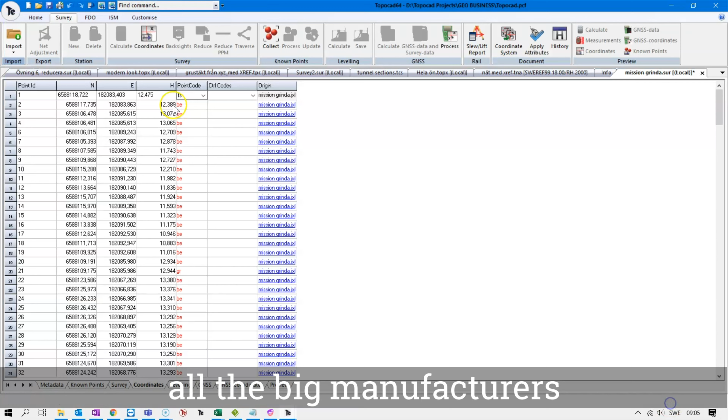That sounds great. In Topocad we have a lot of different documents, and each document has its own workflow. Firstly, our survey document is where you import your survey data. Does it matter what instrument you're using? No, it doesn't matter. In Topocad we support all the big manufacturers, and we also import more open formats such as LandXML or DXF. Oh, that's nice. Yeah, and we can also do an export here to our network adjustment module.

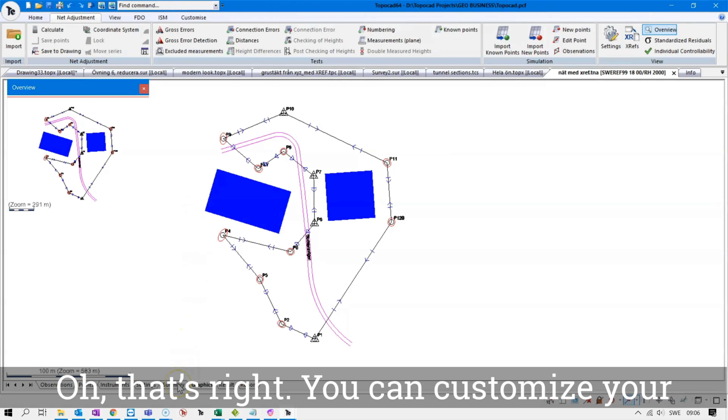Oh, that's right. You can customize your Topocad based on your own requirements, right? Yeah, that's right. So you only pay for what you want to use. That's good.

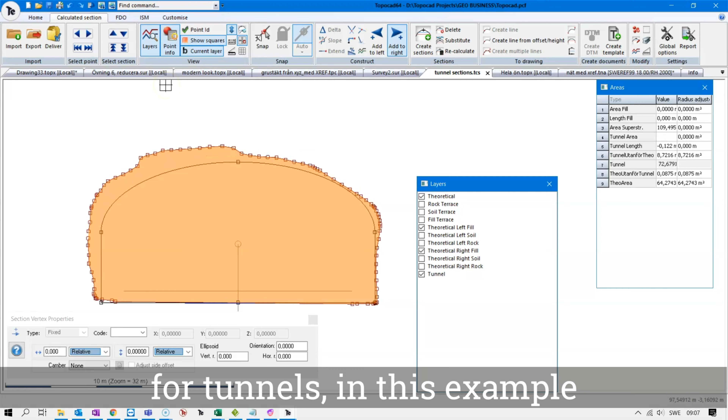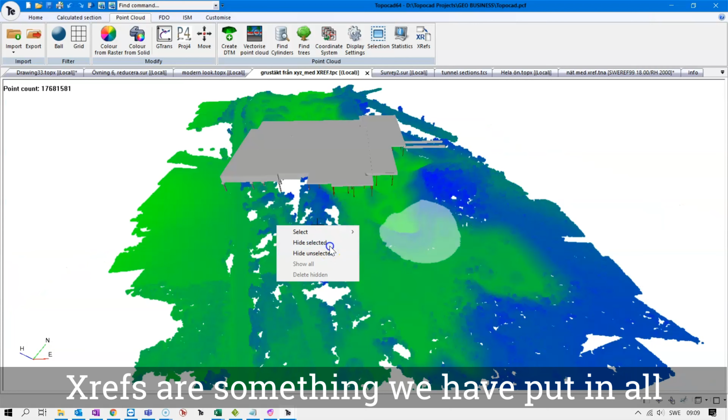And here we have our section module where we can do some volume calculations for a tunnel in this example. And we can also do roads in this module. Here we have a point cloud. In this case we have an external IFC model, which is something we have put in all of our documents now.

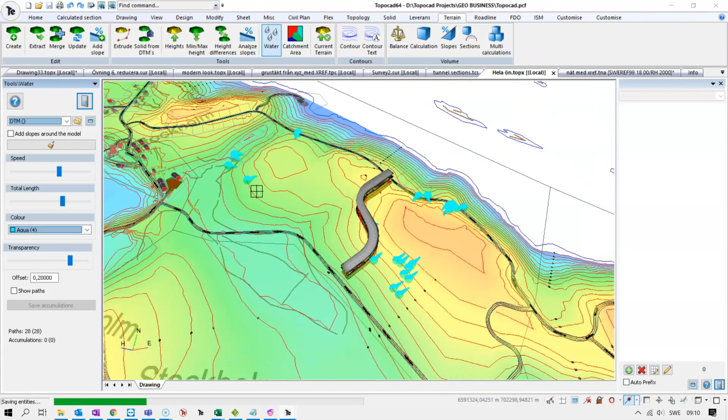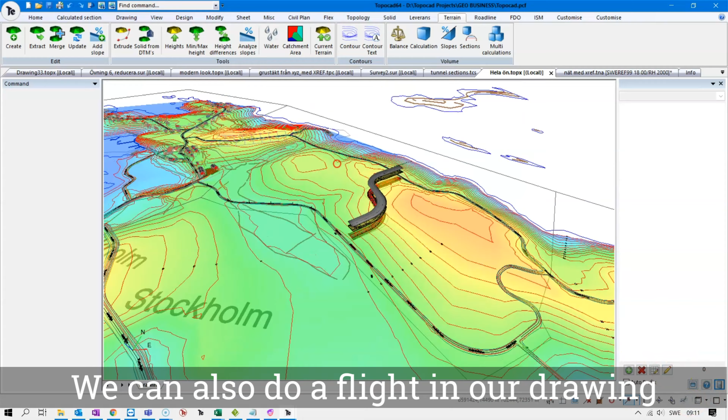And the drawing is the main document, and here we can do a lot of different things such as GIS analysis. You can make your maps here, and here you see how the water will end up if it's raining or something like that, right? Yeah, that's right. So we have some water analysis tools here, and we also do volume calculations and much more. We can also do a flight in our drawing. It's quite fun. Well, I think you get a great overlook over the whole drawing.

Thank you, Jacob. And now back to our most common questions. So the first question is, if the customer only gets an IFC model from the constructor, could you show us how to take out stakeout data from an IFC model? Of course, that's easy. Let's have a look.

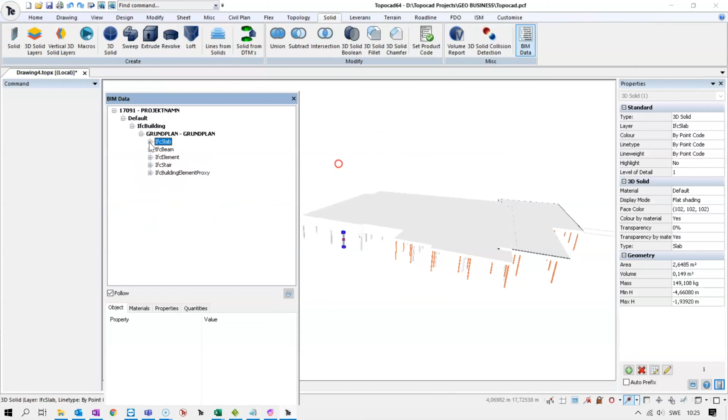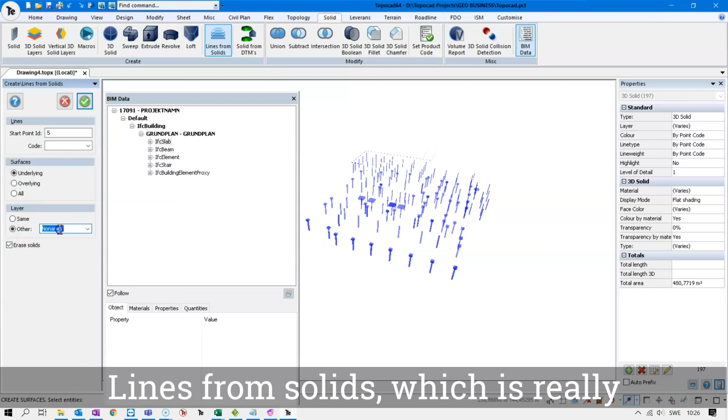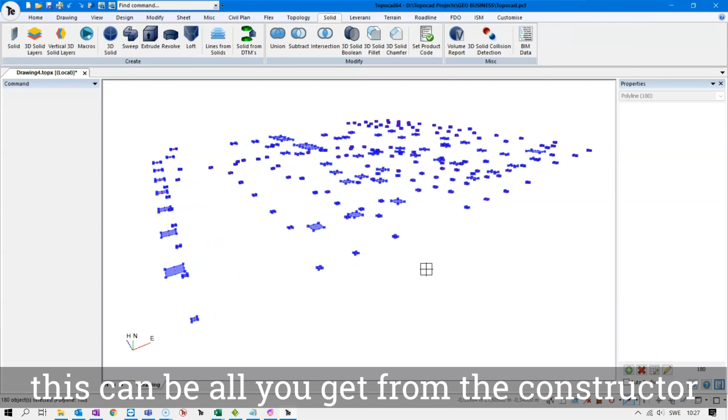Here we have an IFC model imported into a drawing. And here we can see I select the IFC objects based on their class, and I'm deselecting the parts I don't want. And here we have a function called lines from solids, which is real straightforward. We're just taking the underlying lines and putting them on a new layer. That looks really useful. Yeah, it really is, because oftentimes this can be all you get from the constructor, so I really get the want for this kind of function. And here we are exporting it into a DXF file, which you could take into your survey instrument. That's great.

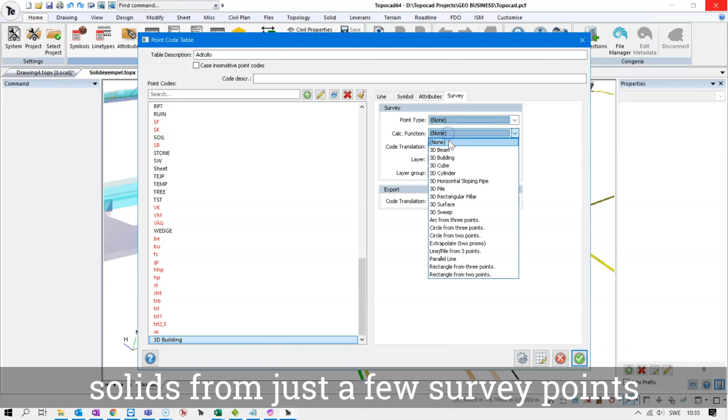Okay, I have one more question regarding IFC models. If the contractor wants the survey data delivered as solids in IFC models, can we do that in Topocad? Absolutely, I'll show you. We do that with point codes in Topocad. We can do solids from just a few survey points, and we do this from a point code. Here we can see 5 measured points can construct a whole solid house with roof and everything.

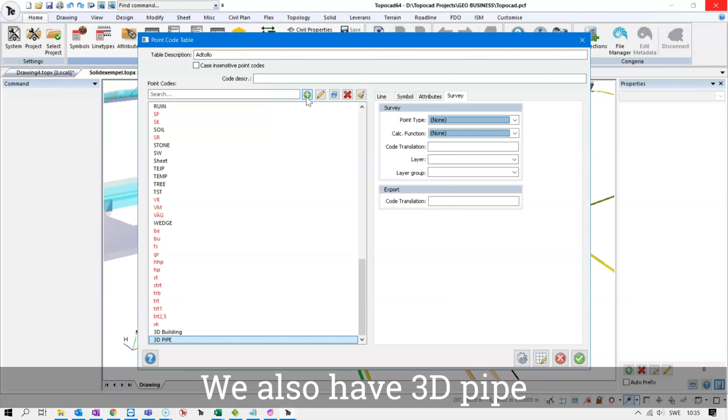We also have a 3D pipe, and this is just a regular line which can give you a whole pipe, and from your point code you select which survey line you're using, and the size of your pipe, and also the thickness.

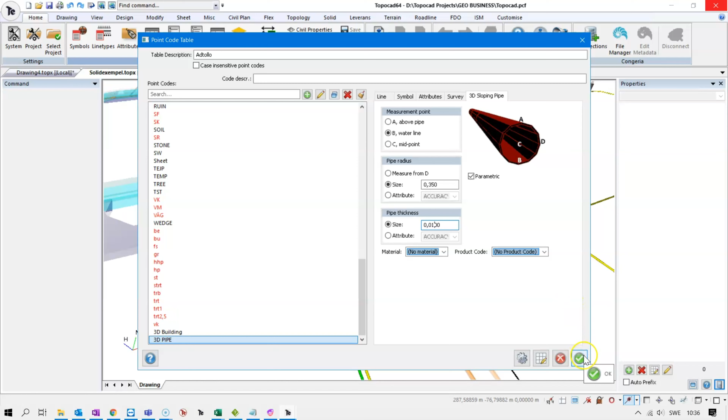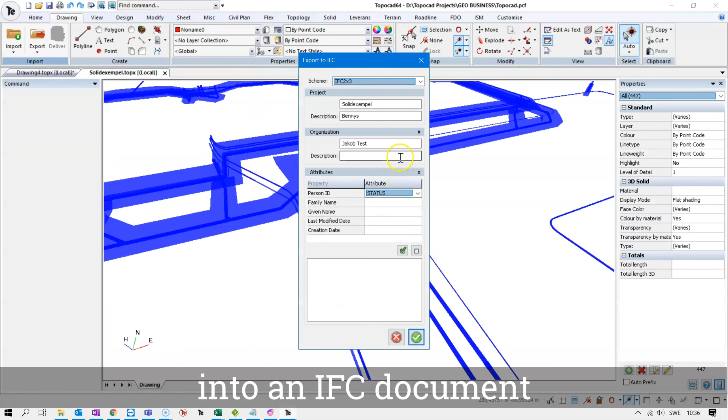This drawing we're looking at is made from one of our users, who is really into solids, and as you can see, it's a great looking drawing, and this is something you can just export into an IFC document. We have the 2x3 and the IFC4, and we're coming up with the IFC5 version of the document.

I have an example from one of my customers who wants to calculate excavation volumes and get them separated into rock, soil and fill. Yes, this is a very common task for our customers, and we have a great tool for this.

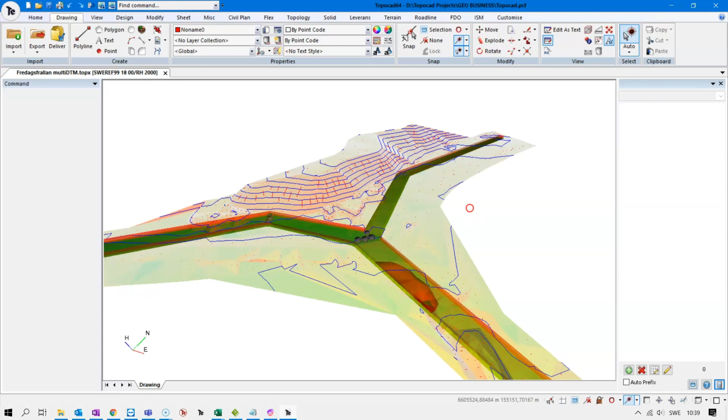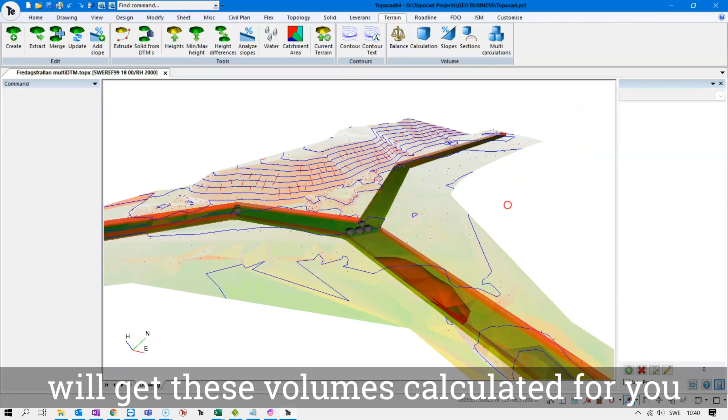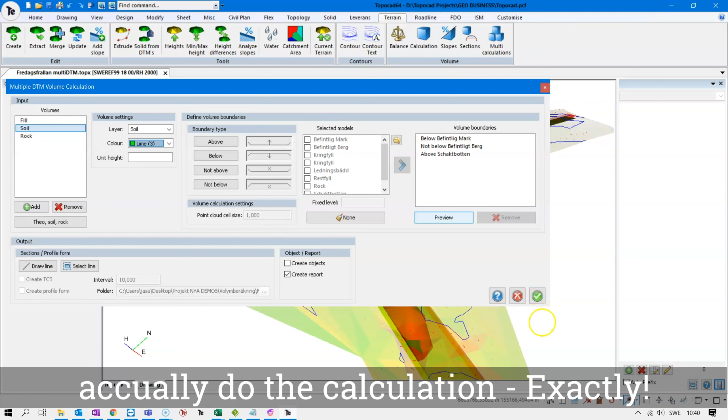For this we have our Multicalculation tool, where you can easily just select all of those surfaces, which would be the ground, rock and theoretical excavation model, and you would get these volumes calculated for you. Well, that's nice. Yeah, and we have this nice little preview button also, which helps you make sure you're getting everything as you may, so you can get a look and see that everything's correct before you actually do the calculation. Exactly, so you don't have to go back if you happen to mess anything up.

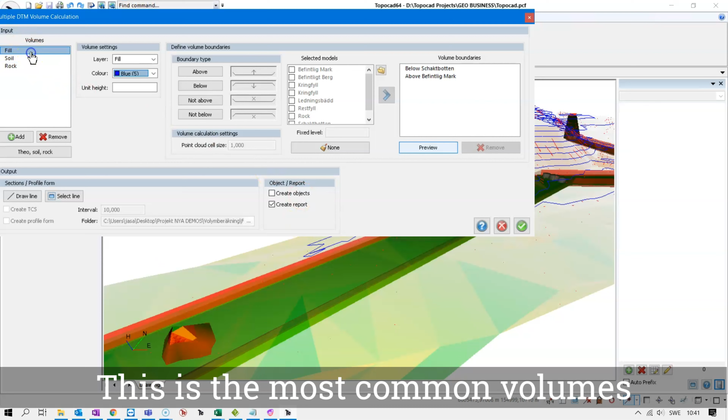Yeah, that's right. And this is what you see in the bright green here. I see. And we can also double check our rock here, and everything looks great. And this is the most common volumes you calculate, but you can do much more. You can do more than 10 volumes easily in this function.

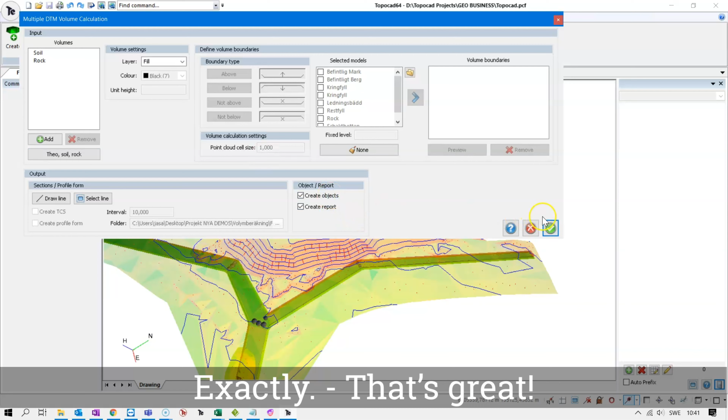Well, yeah, I suppose the most common thing is that you have maybe 2 or 3, but I suppose there are people who want to calculate a lot more. Yeah, and we have the ability to do that in Topocad. Exactly. Oh, that's great. And here at the end you can get out the volumes as solids and a nice little report here.

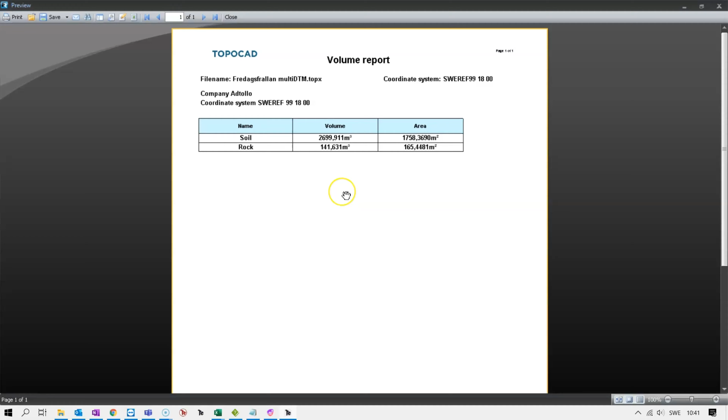Alright, and if I want to calculate volumes along a road line or water pipe with several filling volumes, what would be the best way to do that? In that situation we would use the section template.

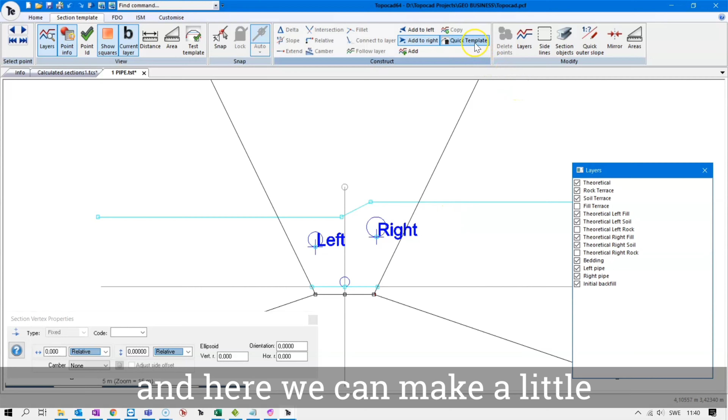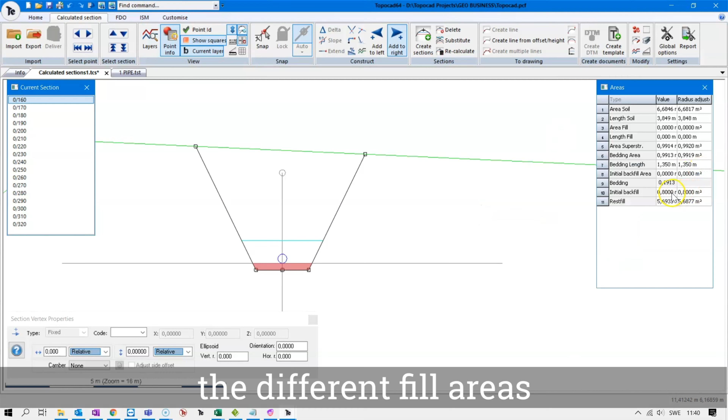Let's have a look. Here we have our section template, and here we can make a little template for our water pipe in this case, and you can, as you see, easily create one with the quick template, and the calculation you do in the calculated sections. Here in the colour you can see the different fill areas, and here you can check the areas on the different sections. Here you can get a lot of different reports also.